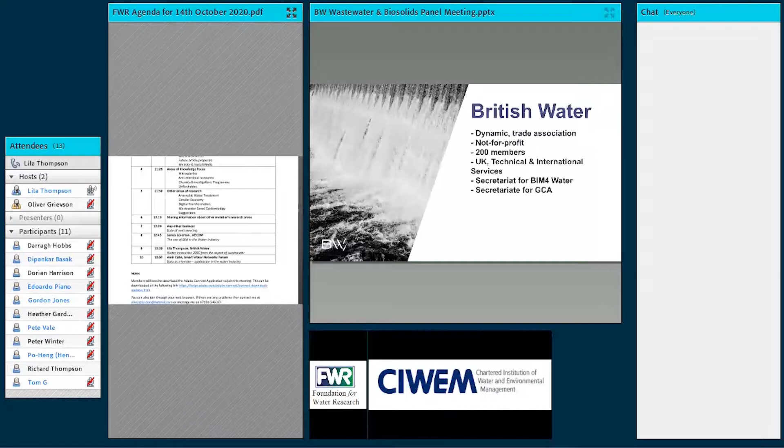We also carry out the secretariat function for BIM for Water, so I'll be very interested in hearing the presentation following mine. And we also are the secretariat for the Grease Contractors Association, which is an organisation of specifiers, installers and maintainers of grease management systems.

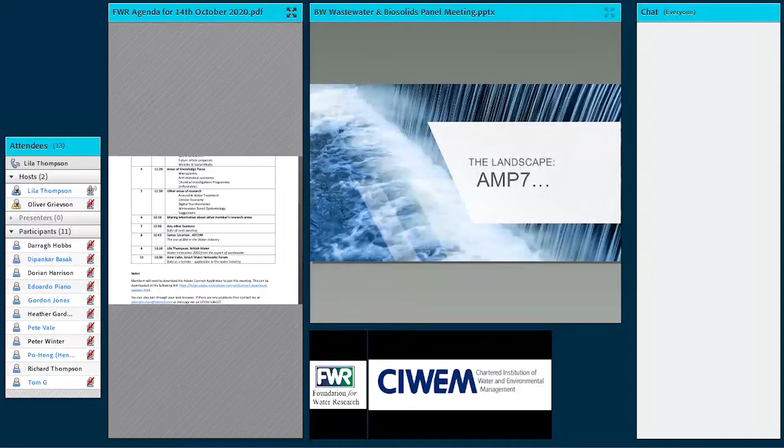So I just thought it would be helpful before I turn to innovation and the strategy to look at the landscape in terms of where we are now. In terms of the landscape, we all know that the final determinations were issued by Ofwat for England and Wales, and that covers a £51 billion spend. Some of the water companies have gone to the CMA, so we're watching closely what will happen as a result of that when the final decision is made.

And then the Scottish regulator, the Water Industry Commission for Scotland, has just released its draft determination for the strategic review of charges spanning from 2021 to 2027, and that anticipates a spend of 4.5 billion on water and wastewater infrastructure and projects.

Northern Ireland has just released its draft determination. The regulator for Northern Ireland Water has released its price determination for the price control 2021, following a similar period as Scottish Water for 2021-2027. That anticipates a £1.7 billion spend.

So innovation needs to be considered against this sort of backdrop in terms of what's happening in England and Wales, Scotland and Northern Ireland—the whole of the UK. What we do as British Water is organise water company liaison meetings to help stay abreast of what the water companies are doing.

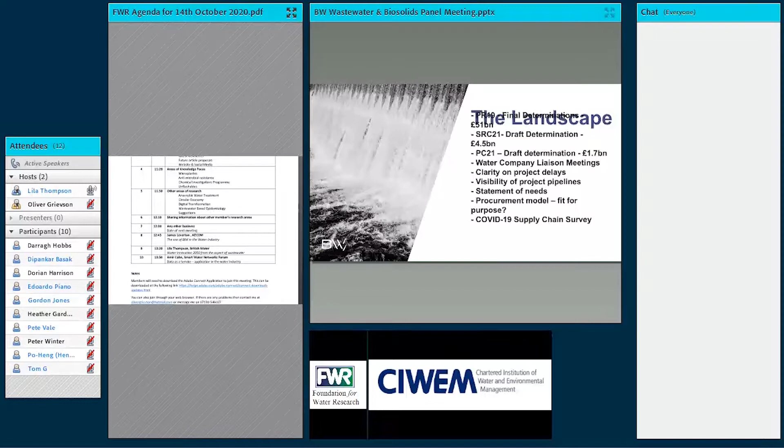Turning to collaboration and innovation, British Water issues a survey every year looking at water company performance across 11 water and wastewater companies. We ask 11 questions around things like innovation, procurement, and communication—how effectively the water company communicates with the supply chain. In the survey we did last year, we got 256 responses.

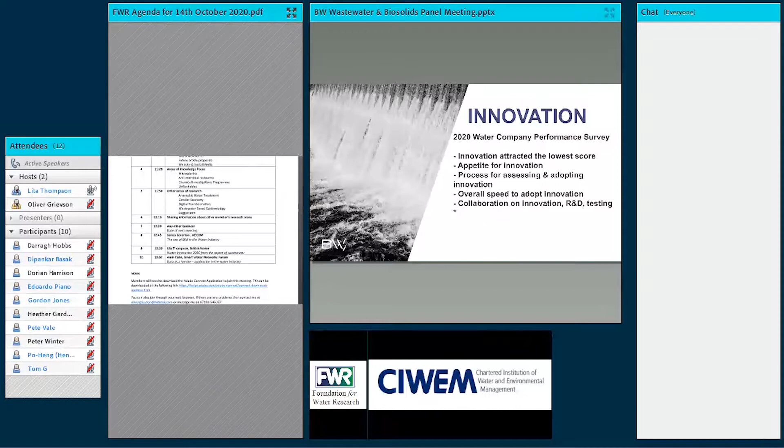Innovation scored the lowest, which might not surprise some of you. That was around questions on the appetite for innovation, the process for assessing and adopting innovation, the overall speed to adopt innovation, and collaboration on innovation, R&D and testing. The last one scored the lowest—so the supply chain thinks collaboration on innovation, R&D and testing is performing poorly. That's something we've fed back to the water companies and are trying to work with them on.

Coming on to the innovation strategy, we've responded, as hopefully a lot of you have, to Ofwat's consultations regarding the £200 million innovation fund, which my chairman often calls the customer's innovation fund, because that's correct. We've been feeding in our views, as have others, on the innovation strategy. We're pleased to see the Centre of Excellence will be a virtual Centre of Excellence, not a new one being established—I'll come on to that—and hopefully it will be launched in spring 21.

We're pleased there's going to be a £2 million Innovation in Water Challenge, aimed in particular at small and medium-sized companies and startups. Rachel Fletcher, in a meeting I had with her last Friday, said supply chain companies should start talking now to water companies to get ready to put in bids for that challenge. Then there will be the £40 million main competition, launching in April 21. At the moment Ofwat is looking for a delivery partner—the tender closing date was recently—and they'll be looking at how delivery of the fund will be governed, with more information to come in due course.

A lot of the times when we talk about innovation, we talk about the existing culture and the resources. So often when I speak to innovation heads in water companies, I'm aware that there might be a team of 3, or maybe 5 or 10. Some of my companies have complained that they're not getting feedback on their innovation, or there might be a trial held but then things go quiet. So I understand there might be a lack of resources, but we need to make sure that moving forward there are sufficient resources in the Centre of Excellence to support the innovation strategy and the 200 million innovation fund.

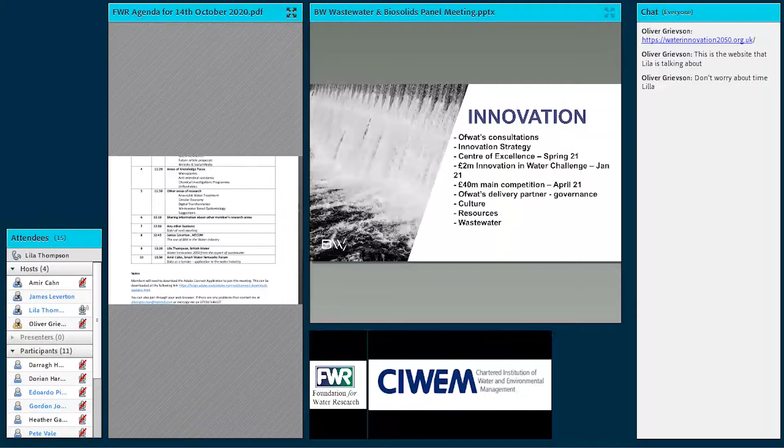Now I just wanted to end my presentation by looking at British Water's response to COVID-19. We've been holding fortnightly Better Together calls, and we've had over 83 speakers over 28 weeks, which has included 10 water company CEOs and other senior leaders in the industry.

Those calls are for leaders in the industry to brief the supply chain in terms of delays to projects as a result of COVID, what projects are coming back on stream, what delays there are to AMP7, Scottish Water spend, Irish Water spend, and so on. It also gets people to talk about the water industry's place in terms of building back better and our place in the green economic recovery.

If you'd like to listen in on the call on Friday, which we have from 12 till 1, feel free to email me. That's my email address on this slide: lila.thompson@britishwater.co.uk. Now, what I would encourage everybody in ending this is that the innovation strategy is a live document.

They really want people to give them feedback, to engage with them. I gave the email address so that people can give their feedback in terms of the strategy and how it's developing. I really would encourage members of this group to stay abreast of what's happening with the strategy, look at the pages that are relevant for your company, and feed that back to make sure your company is giving its feedback on the strategy. But not only that, you can then bid to collaborate, or for the innovation fund once that becomes live.

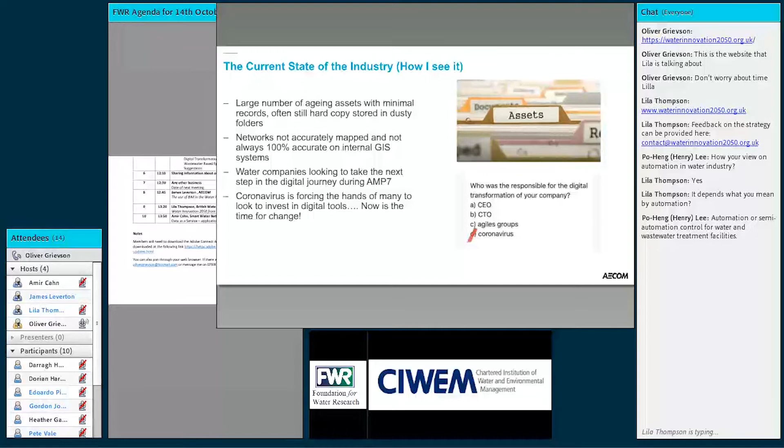So what we start to see is more and more of the water companies are looking to bring BIM into their company, to design and hand over the right information, and they're giving more of a steer of exactly how they see their business going and how we're going to take things forward. One of the big positives, although obviously not a positive in itself, is coronavirus has certainly helped drive some of these digital tools and the implementation of these across businesses, as we can't meet face to face, for example today.

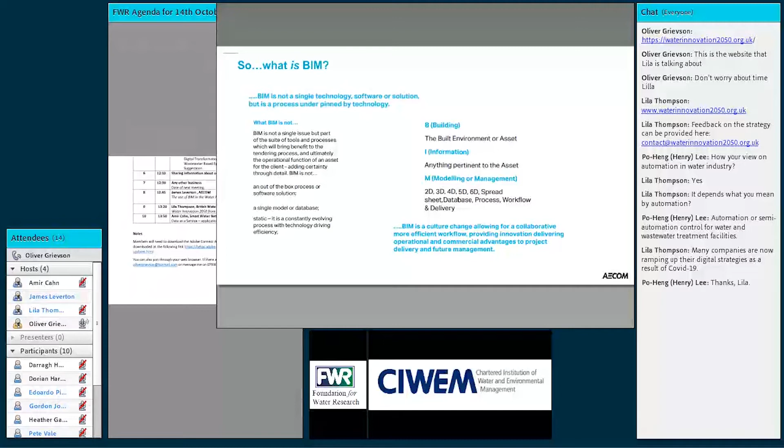So within BIM delivery, BIM level 2 or stage as it's referred to now, multiple dimensions. So obviously 1D, 2D, we're all very familiar with, such as 2D drawings or your initial ideas. And then to move down to 3D, which are the models and the shapes and data-rich models, all information and files or volumes of concrete and all that good stuff.

We take it to the next step. We have 4D, which is that 3D model, which is related to the construction program. You can see your asset getting built over time. And then the next step from that is 5D, which is then associate costs to those elements of the model. And what that will do is give our clients a really good idea of their spend, when they're going to need to spend, and it should give a very accurate outcome of total cost.

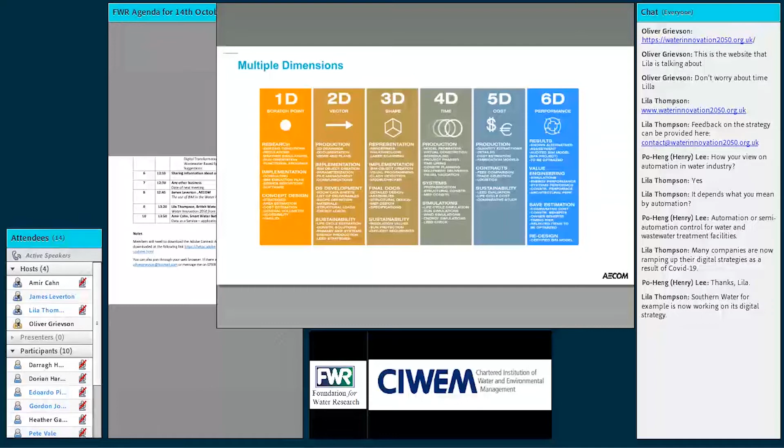And if we just put the next stuff in there, where we really want to be is in 6D. So if you click the next button, please. 6D, this is where we want to be. So all of the good stuff we do from 1D through to 5D should eventually give our clients a really good understanding of the performance of those assets. And in the future, for the maintenance, when they're going to go in and replace certain bits of kit, give a really good idea on how efficient that asset is. Next slide.

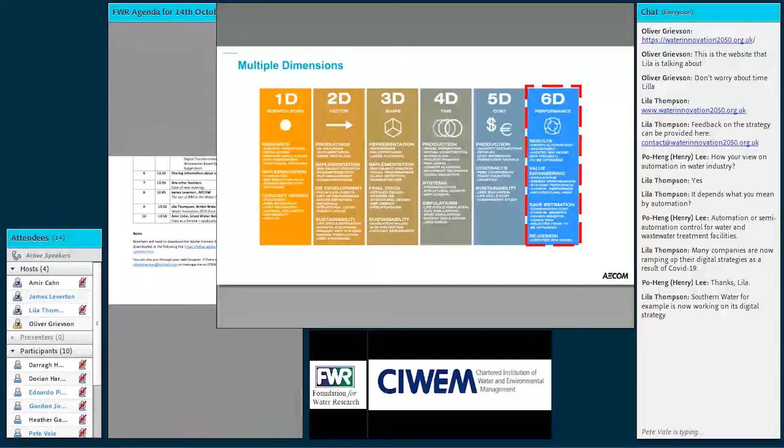So, initial challenges that our clients have - there is a lot of documentation that comes along with the BIM process, so it's really important that our clients have that in place, from their organisation information requirements, which then helps feed their asset information requirements, which is really important. There's lots of benefits, which I'm going to talk about today in the design and construction, but the real benefits at the end are the asset performance and operation.

And for each project we get involved with, our clients give us what's called exchange information requirements. And what that document does is tells us exactly what information they're expecting as part of our design and when they are expecting it and how that information should be structured. And then we formally have to respond in what's known as a BIM execution plan, setting out our plans of how we are actually going to deliver what they are after.

There are other investments in software, so I work for AECOM, as I mentioned, which I'm very fortunate - we have access to most software, so we can use the right software for the job. And as I mentioned in one of my previous slides, there's the cultural change required for a whole industry, from our clients, consultants, supply chain - everyone needs to be moving in the same direction. And as part of that, we need to upskill our staff. So that's one of the most challenging parts I find.

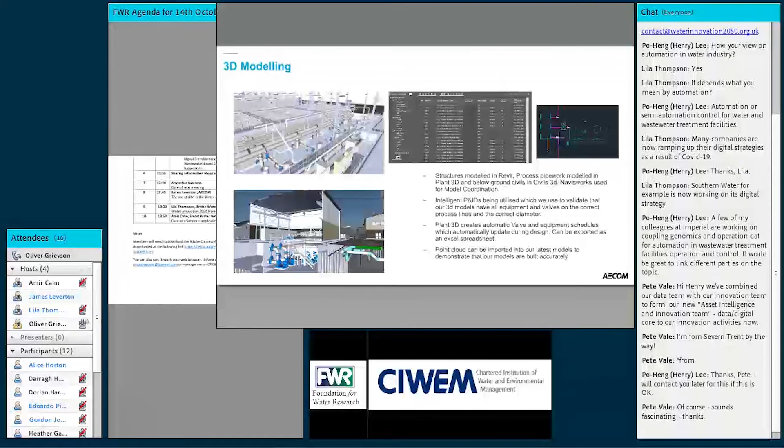Running in parallel with that, we have up-to-date live bill of quantities and equipment schedules. So where traditionally we'd hand over drawings with itemized bubbling for each piece of pipe, now we can hand over an Excel spreadsheet with everything in the model, for the QS to use where they want plans to order.

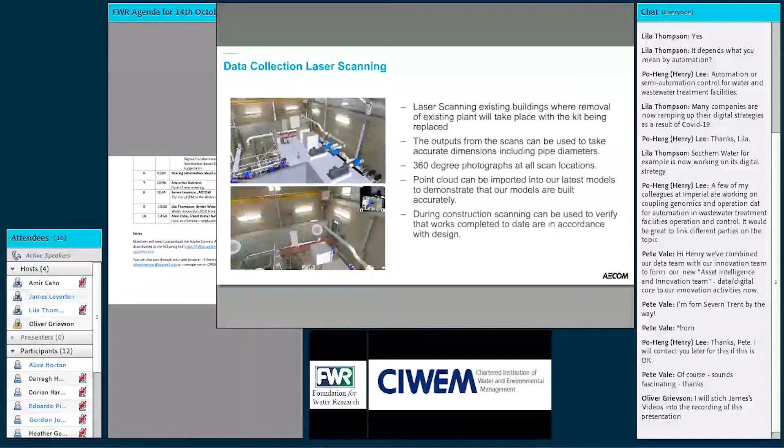The information we have from our clients is often hard copy, paper copy, and not always 100% accurate. So to ensure we're comfortable with the information we have, we can go out and laser scan any buildings or site we're inhabiting. That gives us confidence that our design will fit the existing building, without clashes with any existing structure or kit that's predicted to remain.

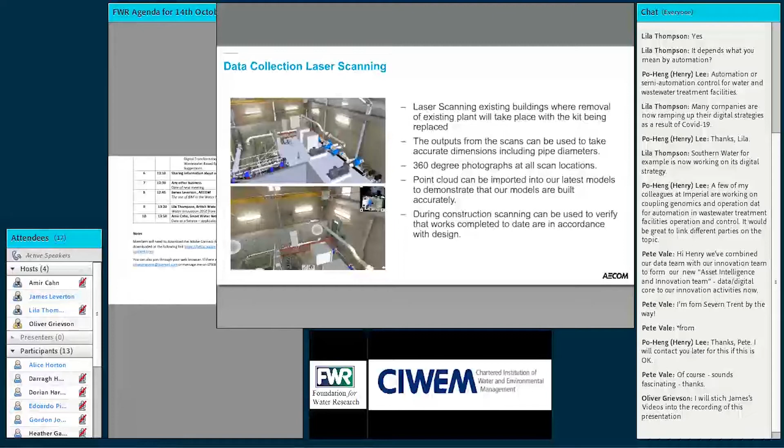If we scan during construction, it will also highlight any potential clashes in the future if something's been built out of tolerance.

We can also use the LiDAR information to generate surface profiles. If we're going to put in a rising main or need a reservoir return height, you can actually model what that will look like in our software from that information.

We also use those for condition assessment of existing assets, saving scaffolding, giving an obvious reduction in health and safety risk without needing access to the roof.

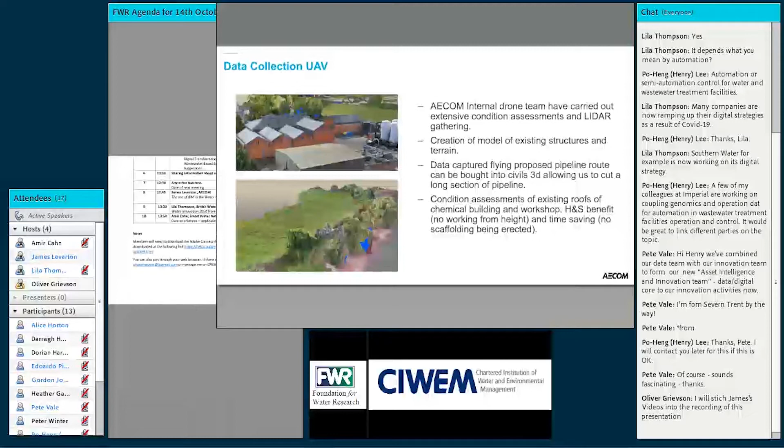I think in the future with 5G, we'll be able to use the drone footage and get feedback live back to, say, a structural engineer in the office, who can direct the pilot to focus on areas of more interest.

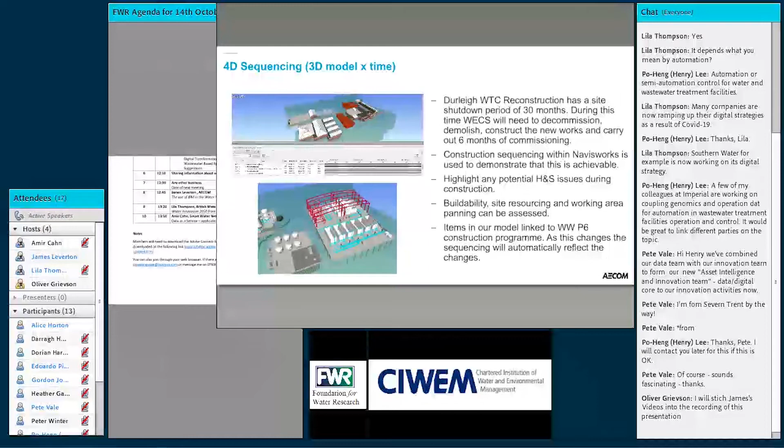It will also give program certainty to actually construct what we need to construct in the time we allow, around our project shutdown periods. It's a great opportunity to demonstrate that it can be done.

With the 4D sequence shown previously, if we were struggling to deliver the project in the timescales through traditional in-situ concrete methods, we can look at doing off-site modular construction. That enables us to build our tanks off-site. Here we have some GAC vessels - not wastewater, it's potable water - which were constructed off-site and delivered to site and dropped in.

The benefit from that is there's a huge health and safety benefit. It's predicted that it's 80% safer building in a factory than actually going out on site to build. There are also significant program savings and a reduction in site waste of approximately 10-20%.

In this example, we had the vessels in stock on site, and when we went back and later scanned them, it became apparent that the vessels were built out of tolerance, and we were going to have a clash when we came to drop the walkways in. So we went back to the walkway supplier with the point cloud and said we've got this clash, here's the data, we can redesign your access platforms around that. By doing that, we saved approximately £6,000 when you look at the downtime and cost of redesigning and refabricating.

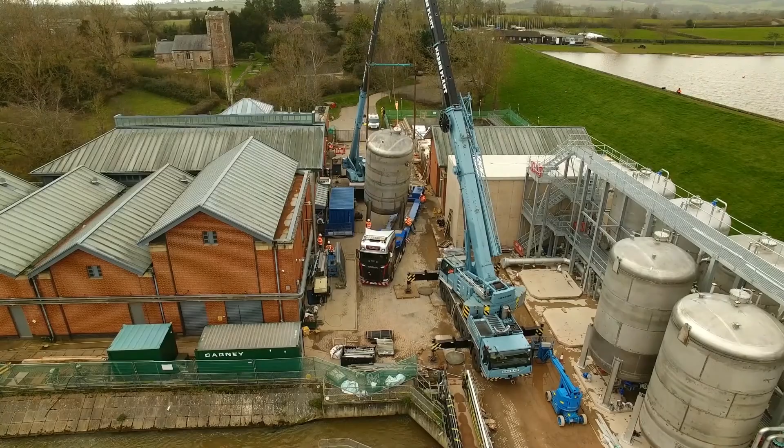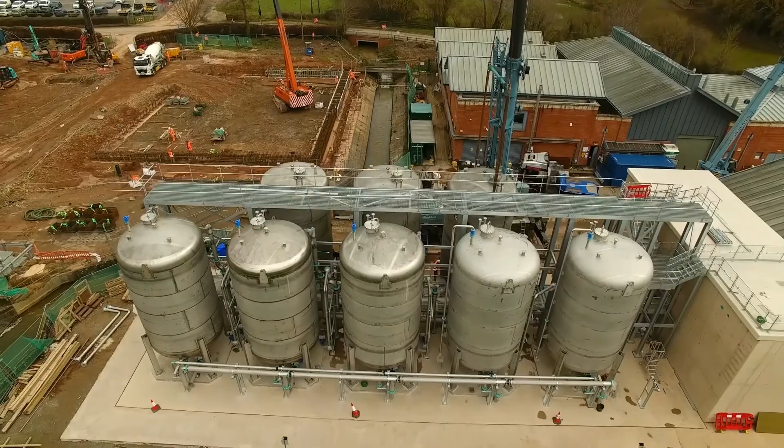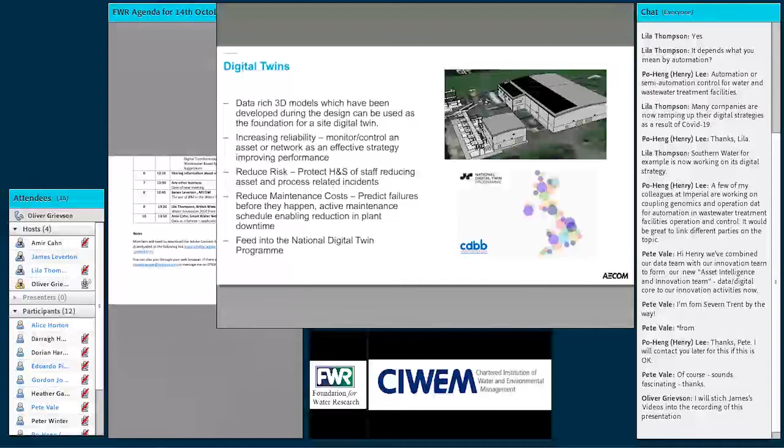Again, that was just a video demonstrating those GACs being delivered. Quickly on that - we managed to deliver those 9 vessels in 5 days, in a very complicated layout with lots of pipework and cable trays, and we had maybe 1 or 2 changes on site. So all the hard work done up front from the modelling and running the 4D sequencing really did help us achieve the optimum time on site to deliver that.

Moving forward to the future for our water companies - now we have all these data-rich models, we can easily produce digital twins, which will assist water companies in predicting failures on their plant. From there we'll be able to generate a good asset management strategy for clients, which will reduce maintenance costs and outage times, and we'll then be able to feed that back into the National Digital Twin Programme.

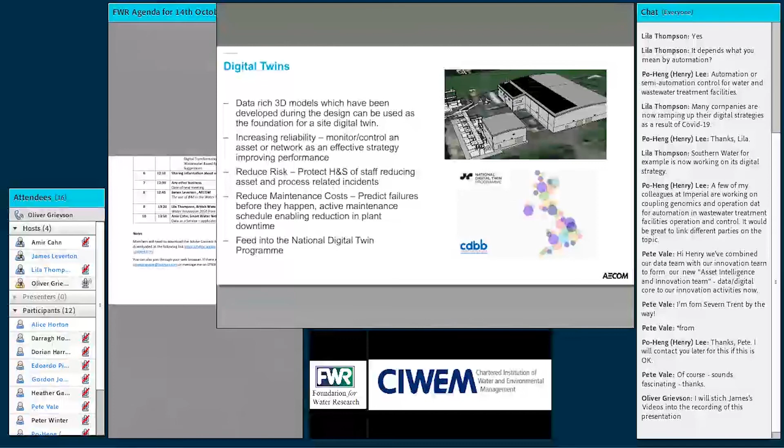We're a little way off there with a lot of our clients, but hopefully by the end of AMP7 we should be in a pretty strong place.

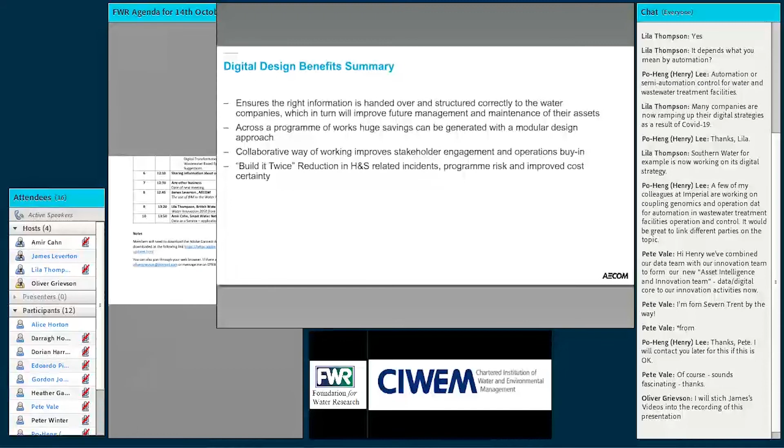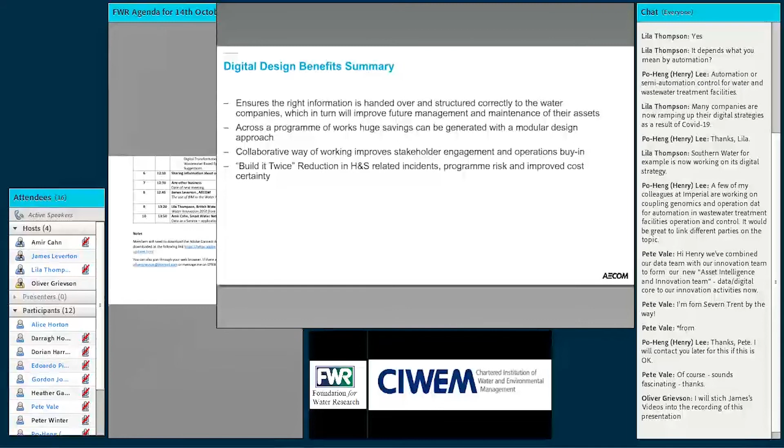This is just the final slide to summarise what I've very briefly discussed - sorry, it's been a bit quick. It ensures the right information is handed over. Across the program of works, huge savings can be generated from modular design, and 'build it twice' is really the key here - a reduction in health and safety related incidents, program risk, and improved cost certainty.

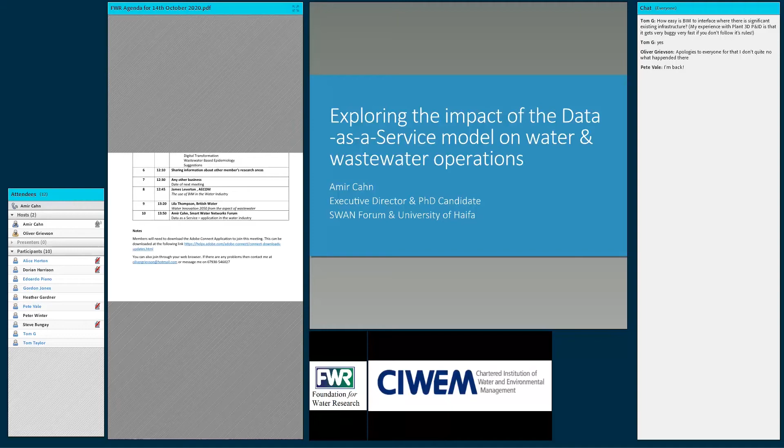Yeah, thanks, Oliver, for the introduction. It's a pleasure to be here. For those of you not familiar with SWAN, it's a global nonprofit based in the UK, and we are the leading global hub for the smart water and wastewater sector, really accelerating the use of these data-driven solutions. Today I'm going to focus on, like Oliver said, my PhD topic, which is really looking at this business model called data as a service.

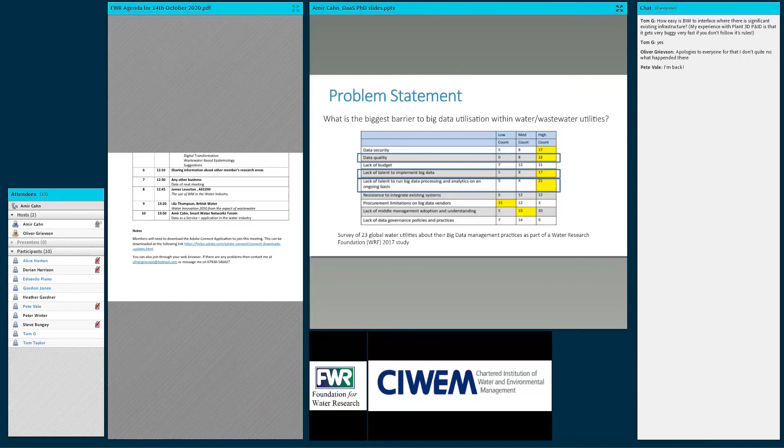So if you look at a problem statement in terms of what is really hindering utilities from adopting sensors and big data solutions, we did a global utility survey, and two of the most common answers were that they struggle with data quality, and also they don't have the manpower to understand and process these analytics. So one game changer for that is this data as a service business model, which involves a utility outsourcing the operation and maintenance of a certain sensor to a technology provider, and they only pay for the data that they wish to receive.

There's a lot of 'as a service' now - maintenance as a service, infrastructure as a service - and I think there's some confusion. But what's meant by a service model is that it's not just one technology, but more of a framework, and the end output you're really looking for is data quality.

So how I defined data as a service in my study is a model in which a technology supplier is outsourced to operate and maintain certain hardware, like a water quality sensor, flow sensor, or level sensor, to measure, collect, store, and transmit data, and the utility only pays for their delivered results.

Today I just want to give a quick overview of my study, which is still in its early stages, and also a snapshot of some results. In my study I conducted two surveys, one for wastewater and one for water utilities. So far I have 45 wastewater and 56 water responses from 22 countries.

The majority of utilities do use online sensors, but a third of them are using data as a service. I'm also interviewing key stakeholders around the world, including global utilities, technology providers, and regulators. Some of the next steps are to do a statistical analysis and look at specific case studies of data as a service across different sectors.

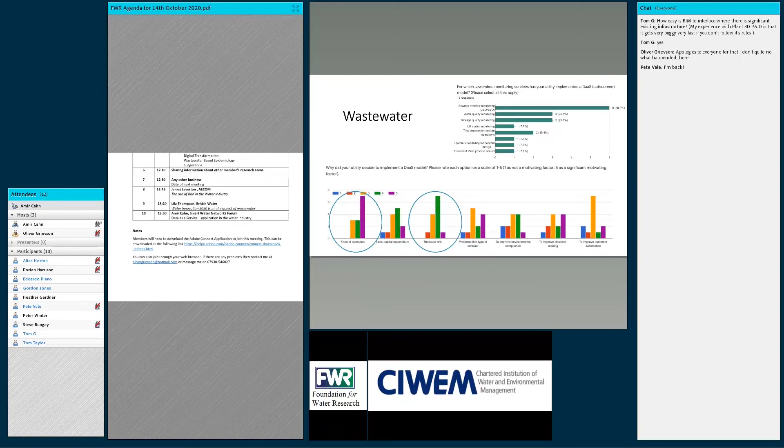And here on the bottom, it shows the motivations. Green and purple are ranked highest. So for wastewater, really ease of operation, reduced risk. Interesting, environmental compliance is not ranked as high in wastewater, and in water, even less so.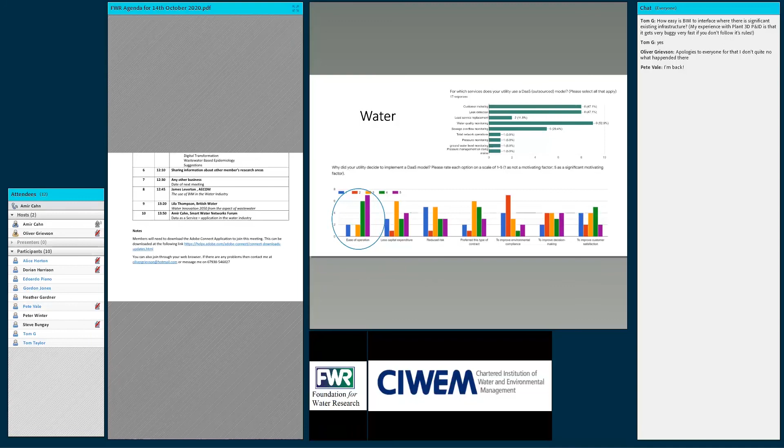In water, there's really a lot of different applications such as customer metering, leak detection, water quality monitoring. So these results right now are not statistically significant because I'm trying to find more utilities to do the survey, but it's an interesting just snapshot.

And then when you talk about what kind of model they're using, for water, it's more common to purchase the equipment and contract out the O&M, whereas in wastewater, it's more of a mix between purchasing and renting it. And for wastewater, in terms of end output, utilities are really looking for summary reports and predictive analytics, compared to water where they just want the data and they can manage the rest themselves.

So some of my discoveries so far are that water and wastewater data results are not the same. I think you can say that wastewater data is more complex and difficult to understand, which is why utilities would want more summary reports and predictive analytics than just the data itself.

There are a lot of hybrid DaaS models in terms of who's responsible for installation, ownership, who verifies the data, as well as the desired results. And like I said, some of the barriers are not necessarily real-life challenges.

From the interviews, a lot of the commonalities between utilities using data as a service is that they're open to being a sandbox or a technology testbed. Data as a service, because a vendor is taking on all this risk, it has to be a long-term contract because the vendor might not break even till year 2 or 3.